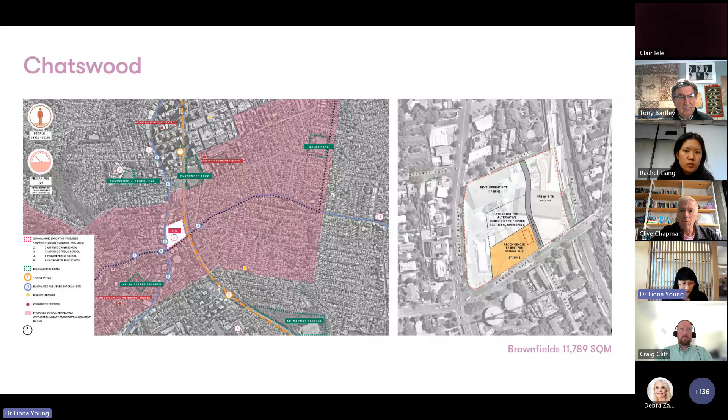2 of the sites were in highly dense urban areas in North Sydney, and these 2 are brownfield sites: Chatswood and Lachlan's Line. They're both around that 10 to 14,000 square metre size.

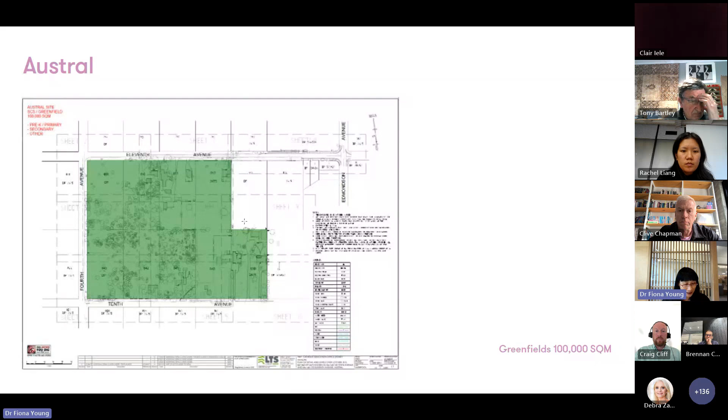We also looked at a more suburban medium density site, and this is Penshurst, which was an extremely difficult, jam-packed brownfield site. And then at the other end of the scale, way out in Western Sydney at Austral, this is a 100,000 square metre greenfield site.

So what did we find? Well, essentially there were 2 different factions in our studio, and half the class felt like we could still do this. We could have a good scalable system, but it needed to be a different form than the current rectangular form that the schools infrastructure were basing their template on.

And then the other half of the group thought, and were very strong in believing, that we needed a new process and approach for designing. So starting with the physical.

Responses beyond the standard box that we were working with - this student talked about the need for articulated forms, and by having more articulation in the form, you can see that it starts to create interesting spaces in between, and how it can start to build up really valuable outdoor learning spaces between each of the buildings.

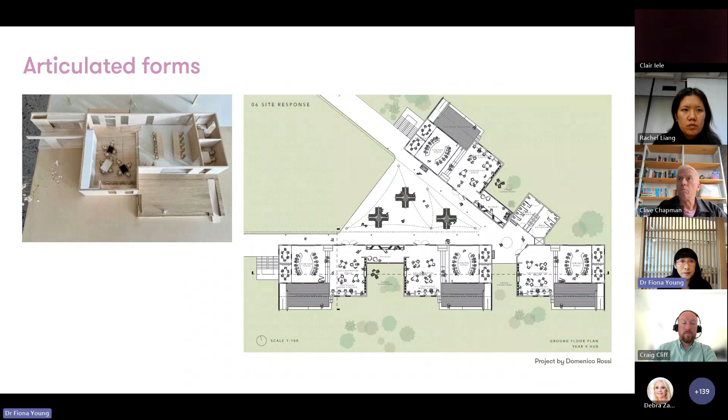Another student group started looking at hexagon shapes because they found hexagonal forms offering a wider array of connections between the different spaces and across different scales, and it enabled better connections indoor to outdoor to create more protected spaces.

Another group of students looked at circular forms because of the way in which they had, based on the research, a positive impact on people.

Another student looked at taking a kit of parts approach, and this, she found, enabled her to tailor her solutions more across quite different sites.

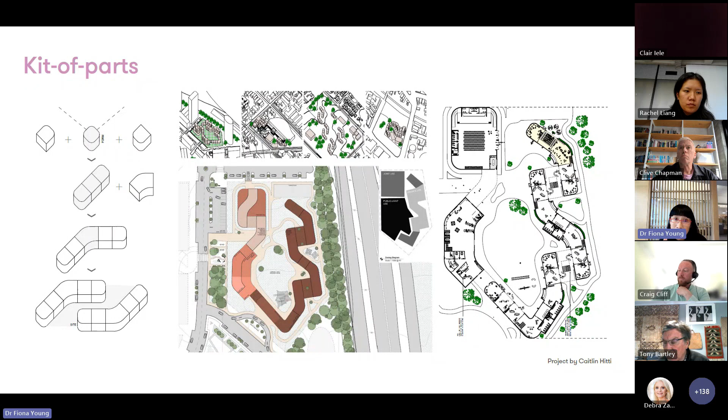So then moving across to process approaches, this Team Eclipse felt that we needed to think about systems in a different way, in a much more process-based way.

That's what they needed to achieve long-term sustainable fit-for-purpose outcomes for the community. And the way they did this is they designed a website to demonstrate how you could interface with a large cross-section of the community to develop a participatory design approach to ensure that you ended up with a much better long-term outcome.

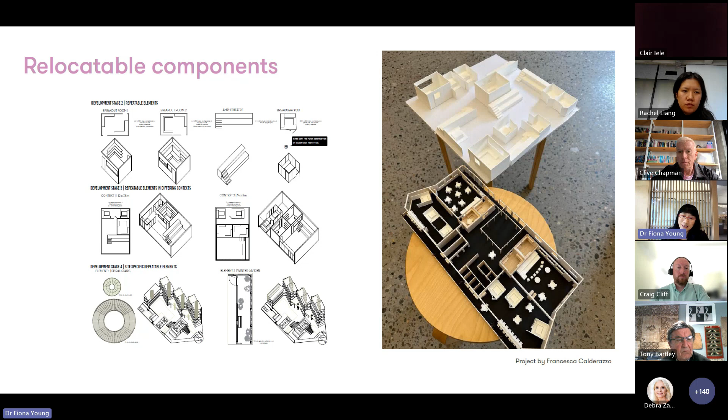They acknowledged that doing this might not be as quick as more of a cookie cutter approach, but then they suggested having a modular interior system so that schools could have a temporary place of inhabitation, whether it was a vacant commercial tenancy or another vacant site, as an interim measure, and then when their schools were built with them as part of that process, they could relocate these modular elements to a new building.

So that was a really quick snapshot of some of the findings before I hand over to Rachel to talk about what her team found. But if you want to know more about this process and about both of the studios, this QR code will take you there, and I'll also put the link into the chat.

So Rachel, I'm going to hand over to you now. Thanks so much, Fiona. So my team, which was Team Hyphen, created a new Schools for Community guide, which was a new type of template that was a more process-based approach.

So over 6 weeks, we decided to critique the current template. And then after another 6 weeks, we applied our findings into the 3 sites, which involved a lot of constant testing and application of this new template form.

The bigger picture for us was basically how could schools better celebrate the diversity of our communities? So we found with the SINSW template that it achieves these 3 outcomes very well, and in doing so, it produces light touch and rapid build approaches that very much cater for the increasing demand for schools in New South Wales, and overall is a very good business model for efficiency.

But it's important to think about schools not just in that lens. It's important to think about what the students and the community needs, and what they need are schools that are future-proof and robust. Not only that, but also impactful for students and make a lasting impact on their lives. That sort of thing really required a model that was slower and more thoughtful.

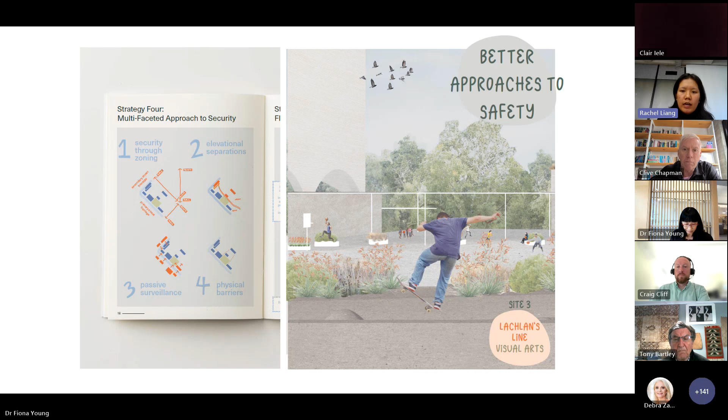On our Lachlan's Line site, we also thought about creating community levels on the ground floor so that you could separate and secure upper floors for classrooms.

Ultimately, a lot of these ideas are to set up students to be independent thinkers. We as educators and designers have to think into the future and equip students to handle real-world situations. This means that for students in later stages, we wanted to create larger and more fluid learning environments so that students had more autonomy with their learning.

The design of each specific learning environment was also influenced by each pedagogical discourse for that stage.

As Fiona said, we based a lot of our research on consultations with students from the Lindfield Learning Village, where students asked for more play and home-like structures, as well as places for refuge, and teachers asked for more centralised storage, adaptable teaching spaces, and technologically advanced teaching equipment.

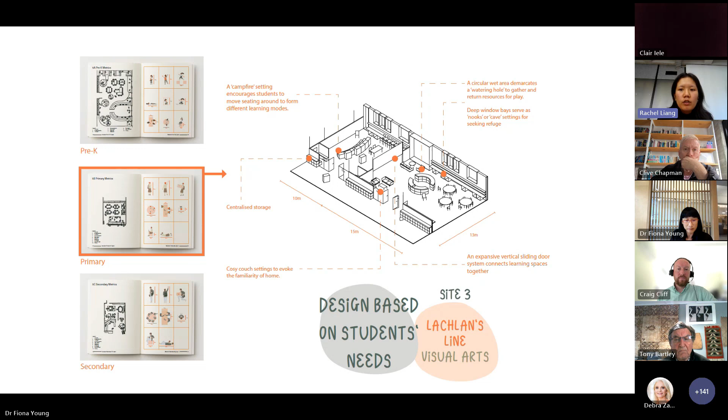All of this could be created and achieved through bespoke designs of standardised outcomes. Ultimately, we want to create a place that is for all to contribute and to activate the school in a unique way. Through doing this, it's important that we consider multi-generational learning that's beyond the classroom, so we have not only students there, but also people from the community that contribute to the learning outcomes.

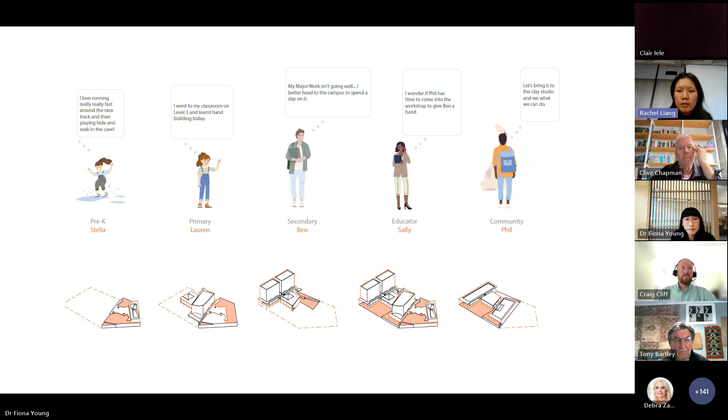And of course, we had to apply that to our own projects, which shows that they're not perfect, but act as a stepping stone for what we might improve on. That, based on as well as post-occupancy databases of surveys from all the students and teachers, might also ensure that pedagogy continues to influence future designs.

So what I learned from the 3 months of working on this project is that the current template prioritizes different things. For our studio, we chose to put people first before profit, but we identified that there's no solution that's completely correct and right, and it's up to us as educators and designers to determine the future of our students.

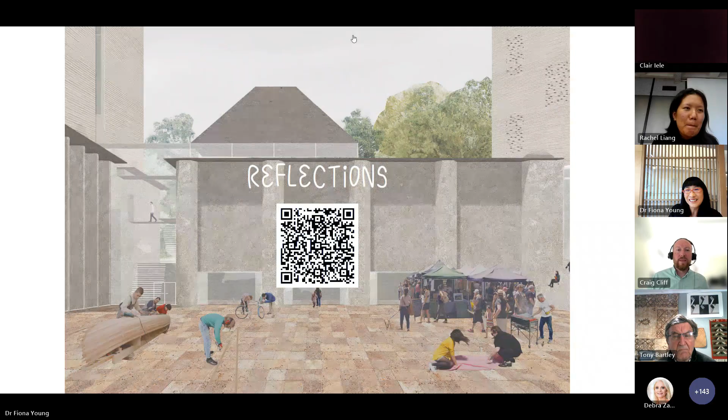Wow, that's amazing. Thanks so much, Rachel and Fiona. It's great that you've got some artifacts that we can share with the people participating today. I know you need to run away quickly, Rachel, but I'll just see if there's anyone with a burning question specifically on what Rachel just presented. You can raise your hand or pop something into the chat. In the meantime, I'll just take a few highlights from that.

So do I understand right that it was 12 weeks that you had to go through that whole process and you ended up with a design brief at the end of it? So that's a bit of a challenge to the Ministry of Education presenters coming up. Bernie, you've got 12 weeks from now, and we'll look forward to seeing the design guide. But that's amazing, and I really like the point about what are we trying to standardize here? Are we trying to standardize a template, or are we trying to standardize the outcomes? So that was really, really great.

So I'll let you duck away, and we'll connect you with anyone. Oh, so we've got a question from Michael. How do you encourage community use in planning or site planning? Any reflections on that?

I guess it would come down to analysing at the forefront what each community requires. So the approach for our design guide is to identify what is missing or what that community is most known for, and to provide those needs concurrently with what the students need. Populating that community function to the public interface with the street is something you would always consider as a priority.

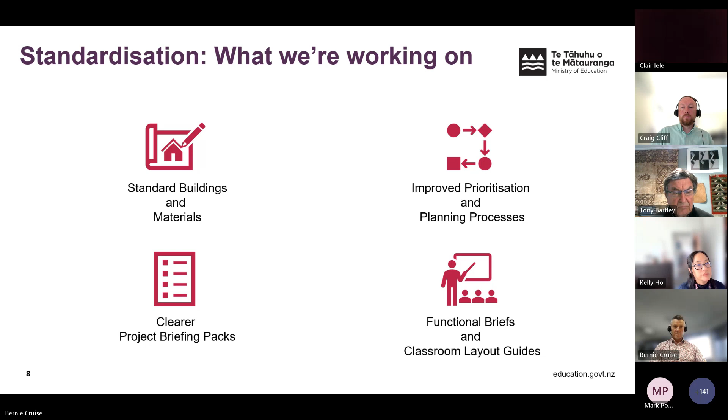I won't dwell on the next couple of slides too long. This is just a graphic representation of the 6 buildings we're looking to develop, everything from a relocatable to a big multi-storey double depth building. Matthew will talk about some of that later.

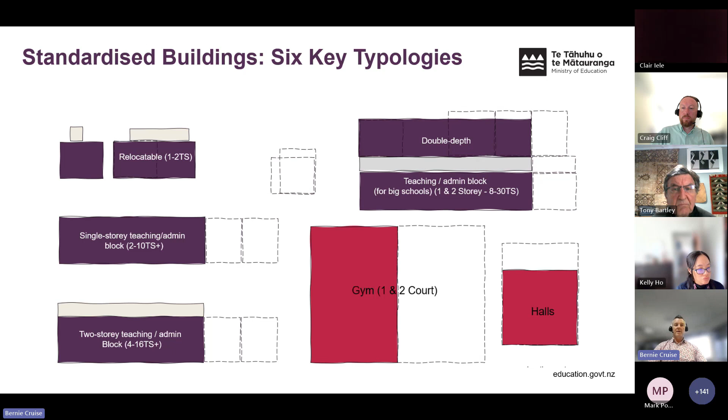When we're thinking about standard designs, we are thinking about the layouts, the user aspect of it, and we're thinking about the technical building asset aspect as well. So we're being very conscious, focusing both in parallel. If anything, the user needs to inform the technical, and that's the approach we've taken so far.

We've got further in our functional brief and layout process than we have with our standard designs.

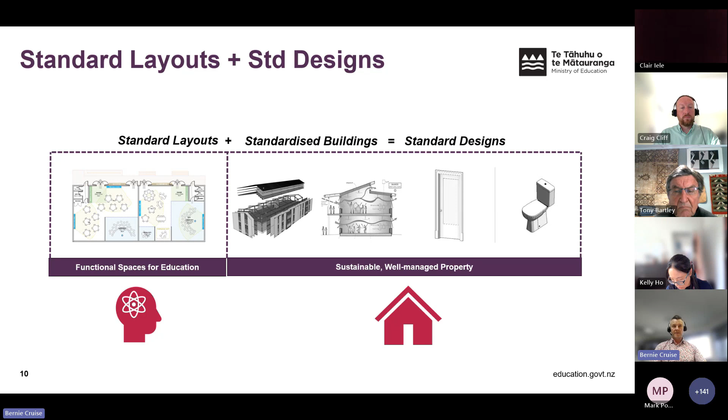You would have seen from Fiona and Rachel, a kit of parts approach was seen as quite positive, and from our engagement with other organisations internationally and in New Zealand that are further advanced than us, we'd agree a kit of parts approach with modular, interchangeable parts and spaces seems to best support our overall objectives. Schools, sites and communities can be unique, and schools will have their preferences for layouts, but we don't need to start from scratch every time.

Eventually these might make their way into buildings that we don't have to touch too much, but we always want that ability to respond to a site or a school's needs without having to throw standardisation out and go to bespoke. So what we're trying to do with our kit of parts approach is ease the burden we're currently placing on schools.

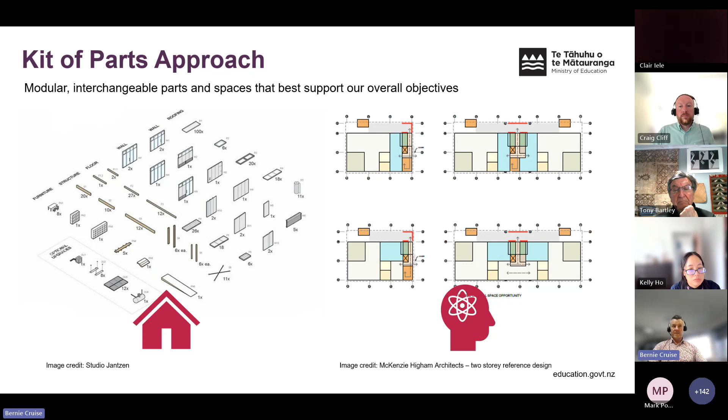By showing successful examples, we're allowing more cost certainty for our annual programs of work, reducing the cost of construction through national agreements for materials, and we also have opportunities to explore facilities maintenance in certain areas where there might be value, where schools might want to opt in or opt out. So a kit of parts or a standardised building from a technical perspective makes that a lot easier at a national level.

In terms of how we're developing standard designs and standard processes, we want to do a lot of learning from what we've currently got. We've got a large amount of data and good research capability in the ministry, so we're tapping into this information to support our understanding and produce evidence-based solutions, even if they're just a starting point. As an example, we've got hundreds of education briefs we can draw upon, and a number of post-occupancy evaluations — that's a really good starting point we need to look at.

When we're looking to develop standard designs, there's already a lot of information in our folders and file systems. We want to apply best practice processes to ensure we're delivering the right solutions in the right places. We're really keen to strike that right balance of collaboration and risk sharing as we develop standard designs with the industry, creating an environment where genuine innovation can happen, rather than an innovate-or-die burden placed on our supply chain.

And of course, we want to engage with education practitioners and experts as we develop our designs. It's really clear to me that education outcomes are our reason for being, and if we don't create environments that work for schools, we're essentially not doing our job properly.

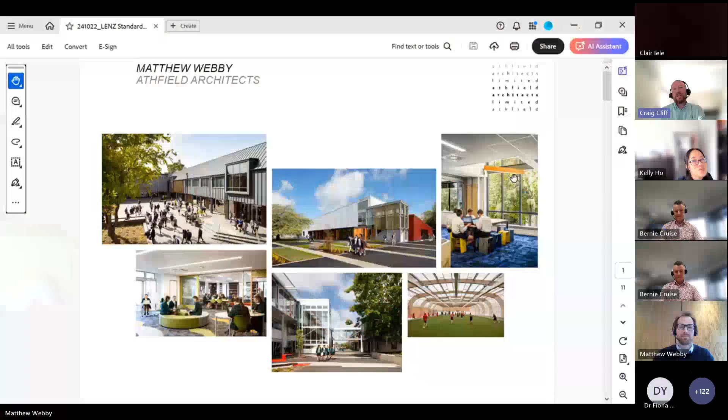Tēnā koutou katoa. Thank you for the introduction. And yeah, it's been a fascinating talk so far. So as Craig said, my background and most of my career has been in the space of education and community facilities and delivering those across Aotearoa.

The practice I work with, and many of my colleagues at Athfield Architects, our focus is always on creating buildings that respond to their place, their users, and their community. So I guess standardisation on the face of it doesn't necessarily align with that perfect fit. But in the design of our buildings, we are often doing those iterative refinements, but focusing on those bespoke outcomes.

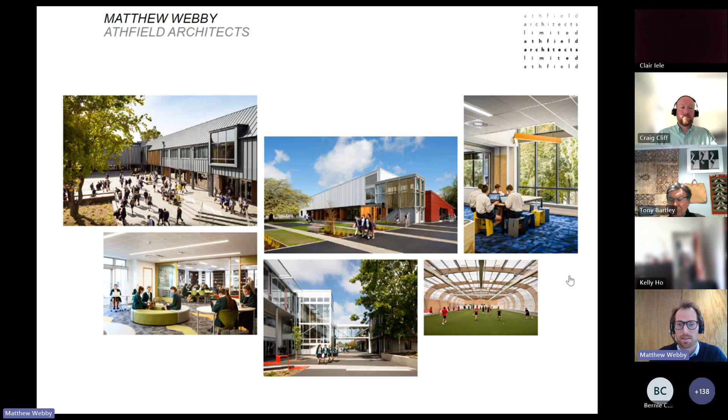At the end of 2023, we were challenged by the Ministry of Education to come on board and start to consider some of those standardised two-storey building typologies that Bernie had on his screen before, and look at how we can achieve greater efficiency, certainty and quality. And I guess, you know, we're very cognizant of the broader drivers, and really committed from our own perspectives around delivering quality learning environments to our communities around the country.

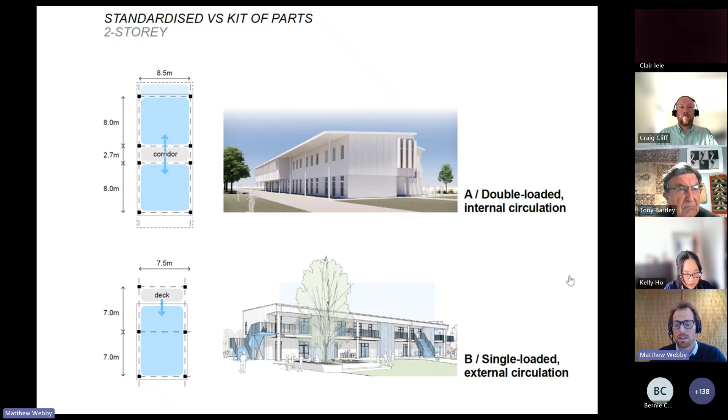And I guess that approach of the kit of parts was arrived at quite early on in our discussions, and something that really resonated with us around allowing the standardization, but allowing some degree of that configuration to respond to those bespoke outcomes.

The work that we've been doing has certainly not been done in isolation. It has been done really closely with the Ministry of Education, and we've had a spectrum of really talented consultants who collectively we've been developing these different models for two-storey building typologies. And I guess looking forward, we're really optimistic to be able to expand this list in front of us and find ways that we can develop that kind of feedback loop, so that the work we've started continues to get refined rather than continuing on many different tangents.

Through the process of developing those standardized approaches, we narrowed down on three key strategies. First being that kit of parts to achieve that efficiency in design upfront—there's a lot more certainty when we first have those conversations with the school. Pre-construction and construction, while maintaining the ability that we can come up with responses that are both specific to the school and specific to the context that they're in.

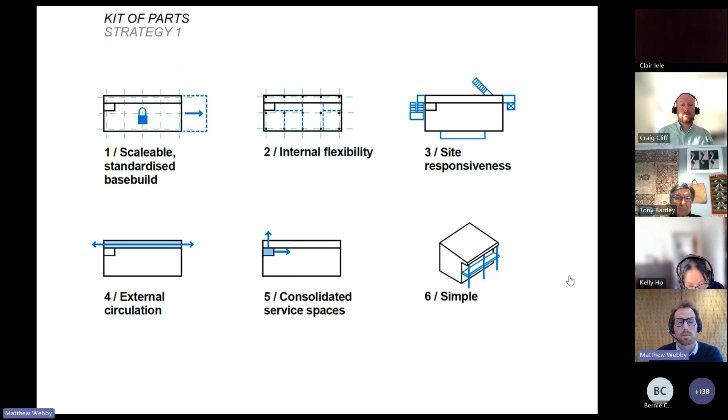At the heart of it is really a structural grid, which is regular, and then a series of moves that adapt the corners, the edges, and a free space in the middle that can be configured to the response of the brief. Much in the way a commercial building is typically built, where there is a base build and then individual tenants come in and fit out the interior, but with the ability to work with schools and their context to configure those parts.

This comes together in a fairly technical kit of parts, and this is where there's a need for a huge amount of research, development, feedback loops, to avoid some of those things that Mark didn't give my profession an overly glowing reference for, so that we can make sure we aren't making those mistakes, and that we are learning from the best exemplars out there.

When we think of standardized buildings, there is often an assumption around volumetric offsite manufacture, where chunks of buildings are manufactured offsite and craned into place. Our working hypothesis, which maybe in the long run proved wrong, is that an elemental approach to offsite manufacturing is most appropriate for buildings on that kind of two-storey, larger format scale.

We take into account there being a strong driver from the ministry to keep the interior plans fairly unencumbered by things that get in the way.

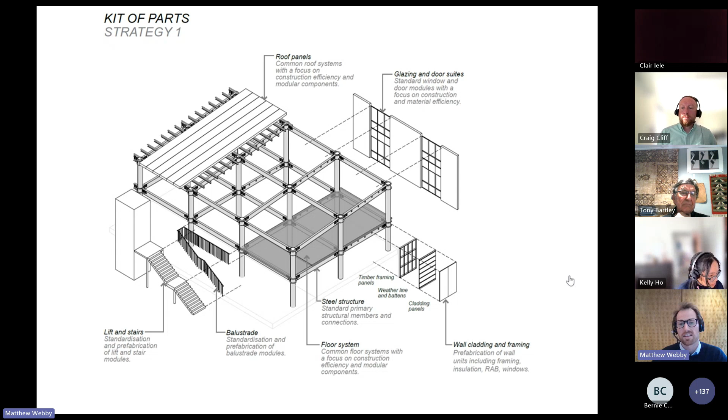Standardising an approach across New Zealand is not as simple as it may seem when we take into account the significant variation in both seismic and climatic conditions across our country. That's something much more work needs to go into, working out whether it's better to design a solution that fits all, which would arguably be over-engineered in some contexts, or design specific and therefore lose that standardization, and where it sits in that spectrum in between.

Fundamental to the kit of parts approach is arriving at a structural grid that is permissible to the spectrum of rooms that are ultimately going to be housed within the building, and that flexibility has been considered both on day one and into the future, acknowledging that these buildings want to be assets that last a long time. As anyone who's worked in old schools knows, they get configured many times over their life, so fundamental to this grid is arriving at something that permits that flexibility long term.

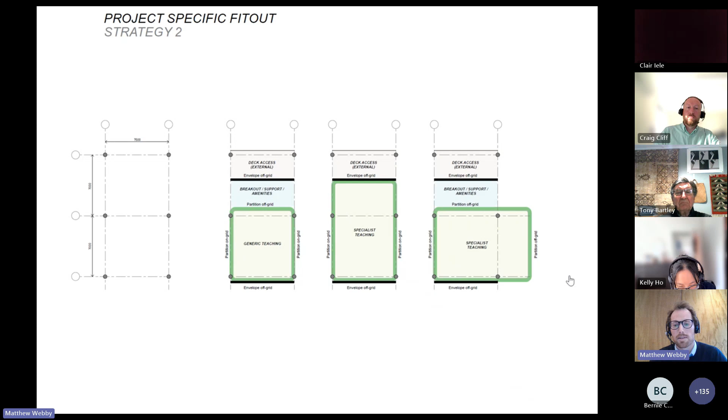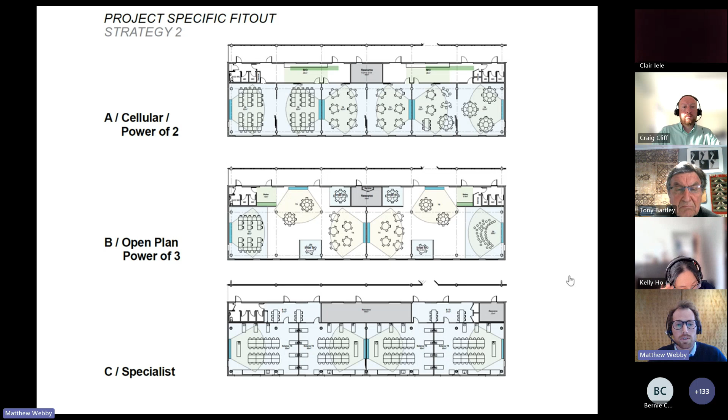We derived those grids through extensive precedent analysis, structural optioneering, noting that different structural grids have different structural implications, and a series of test fits looking at how we can create a common grid that works for both cellular pods arrangements and open plan, and critically, the one that challenged us the most was around how you actually fit in specialist spaces, which often require those larger format open spaces.

Within that, there's also the question around scalability. So within the single loaded model that we were looking at, two-story buildings that housed between 6 to 12 teaching spaces, and any permutation in between.

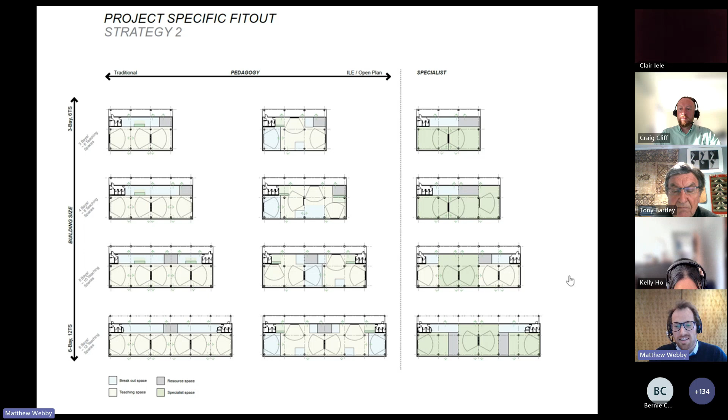So far I've talked about the building in isolation, but fundamental to our approach is the acknowledgement that these buildings need to be site responsive. Having a standardized building that ignores its context is unlikely to be a successful building.

When we look at our school campuses across the country, they are in no way standardized. Fundamental in our thinking was that we wanted to come up with a kit of parts that could be responsive to local climate, to existing built environment, to cultural context, and those fundamental things around getting sun in the right place and putting edges in the right areas of campus.

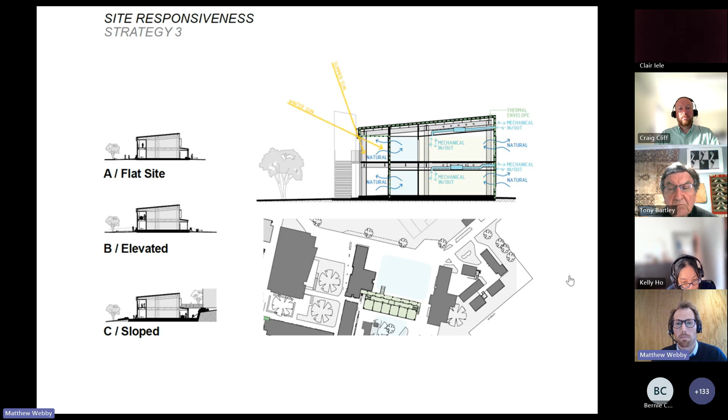Our view was that the kit of parts approach provides a degree of flexibility that allows us to engineer the best outcomes for both the building and the wider campus, and the interaction between the two. This is very pertinent because, on the whole, where we're looking at those two-story buildings getting applied is around where campuses are densifying. Yes, it may be easy to put it on the periphery, but it's unlikely to be the most appropriate spot.

As we see this coming together, it's safe to say we're keen to see these things develop and get tested against the spectrum of real world briefs. We're very keen to see these schemes developed so we can deliver on those efficiencies and cost certainties, but also balance that by investing in areas that make buildings site-specific, acknowledge what the school is needing, and ultimately deliver buildings that become valued by their schools and communities. That in turn means those buildings have custodians, which is ultimately what means they become long-term assets, not liabilities.

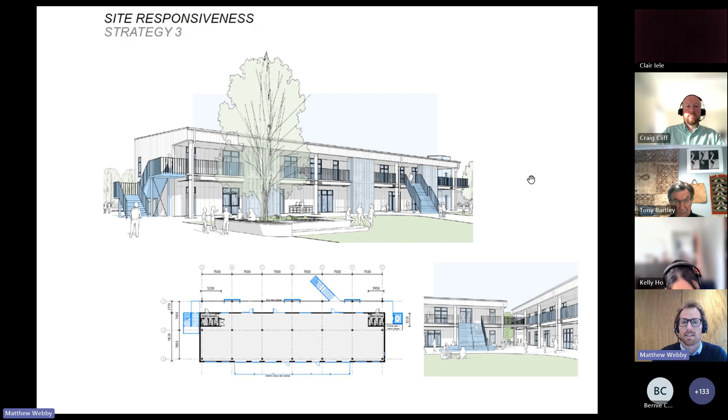To wrap up, I just thought I'd conclude with some reflections on the process we've gone through. Acknowledging, as I implied at the start, when we first began there were a lot of internal questions that myself and my colleagues working on this faced around whether this is the right approach that we want to be backing.

What I think the challenge for us is, for both the client, the Ministry of Education, and the design teams, is looking at how there can be much greater rigour around which bits are acknowledged as standardised, and which bits we can invest that time and energy into to deliver really excellent results, while still balancing that need to create efficient buildings that are equitably delivered across the country. So I'll wrap up there and hand you over to Craig.

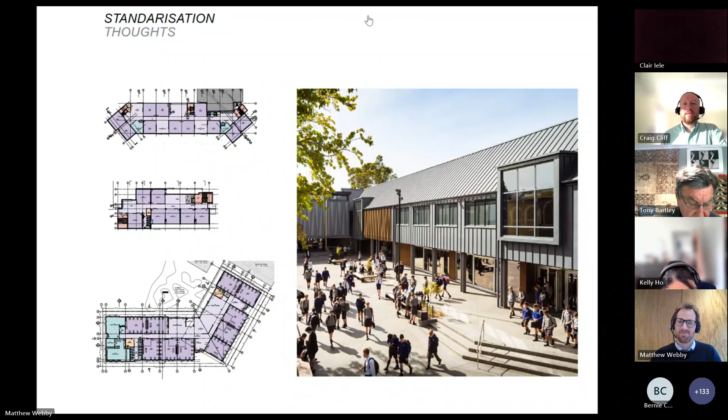Kia ora, Matthew. That's great, and I feel like we've covered a lot of ground already today. One of the things Bernie mentioned was the work in both English medium and Māori medium, and Mark covered the importance of thinking about inclusive design, particularly for students who might have different physical and cognitive abilities. Maybe I'll start with you, Matthew, in terms of cultural considerations.

So not just thinking about Māori medium as a specific need, but how have you considered the cultural aspects that may present at different sites, and how your standardisation response can support that?

That's not something we've specifically engaged with any mana whenua on. But I think it does go to the heart of the approach — instead of these two-story buildings being a standardised building where you can maybe change the colour on the corner, it's a set of parts where, if you get that engagement right in the early stages, you can consider the placement of the building within the campus and the placement of elements within the building.

I guess the working assumption we've been working on is that those interior fit-outs are done specific to the school, so there is an opportunity there. Certainly something that justifies a lot greater interrogation, but that's where we're at the moment.